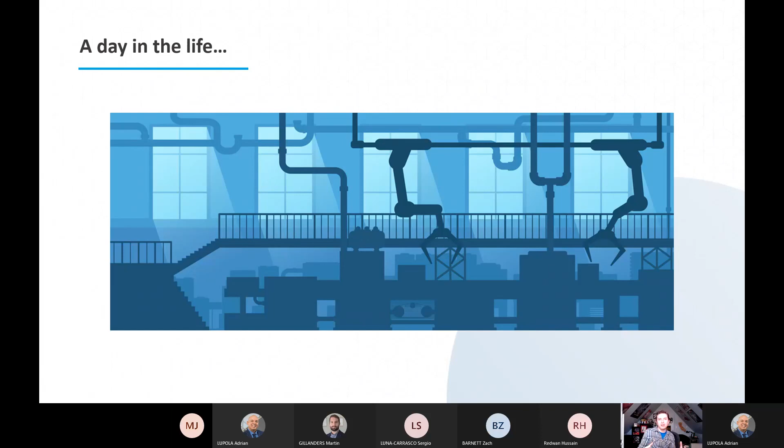It doesn't seem that bad, but do I really know how often that machine has gone down? What am I doing to track that machine performance in terms of what's the uptime? What's the output of that machine? If you're using a system like spreadsheets or pen and paper to manage your maintenance, you don't always know what that information is.

Inefficient maintenance practices is another area we come across, right? In that particular example, I walk out to the plant floor and I've never worked on that machine before. So it takes me a little while to figure out what the issue is and diagnose what's going on. And to further that scenario, parts and supplies management. That's another area where I mentioned in that scenario, hey, the belt happened to be in that storeroom at that time, but what if the right part's not there? How are you tracking your inventory?

If you're doing things manually, you don't always have that visibility, and sometimes those downtime situations can end up getting a lot worse. Not only that, but hey, I went in the storeroom, and what if the storeroom person isn't there for me to check out that part, right? Sometimes you end up using inventory and not logging what you're doing.

So then finally, it's lack of visibility to data, right? We're out there, we troubleshoot the machine, we get it up and running again. But at the end of the day, if we're using something like a spreadsheet, we don't have any information that says, hey, this machine's broken down 3 times this year, 2 times this quarter, whatever it is, right? There's some guesswork that's going on. And we're talking about a group of techs, a group of maintenance folks. How do you account for when these people leave, right? You start losing some of that tribal knowledge. So hopefully that scenario illustrated what these situations look like.

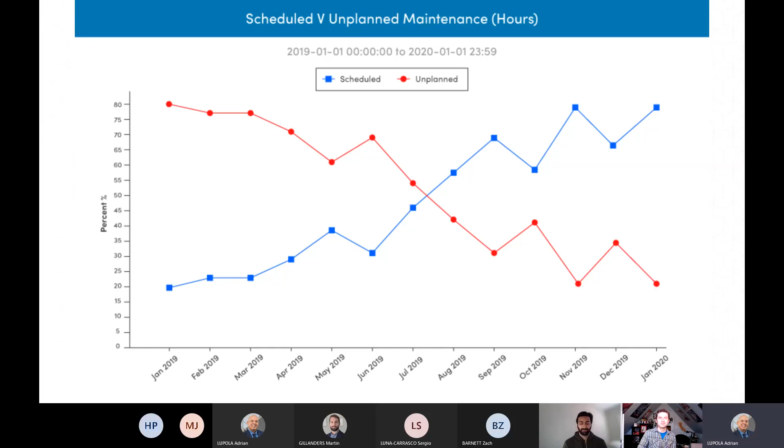So I'm just going to pivot over to a couple other tools that work very well with Fiix for more of an enhanced experience. And before I talk about OEE, Chris was mentioning how there could be visual aid that supplements the new technician's experience of working through different work procedures.

Now imagine the new tech comes across a job that they haven't come across before, or a scenario that's a little out of the norm. And the subject matter expert isn't available because you're either working on something else, or the subject matter expert is located elsewhere and you just can't get to the new tech. What do you do? You can use extended reality to communicate with team members remotely.

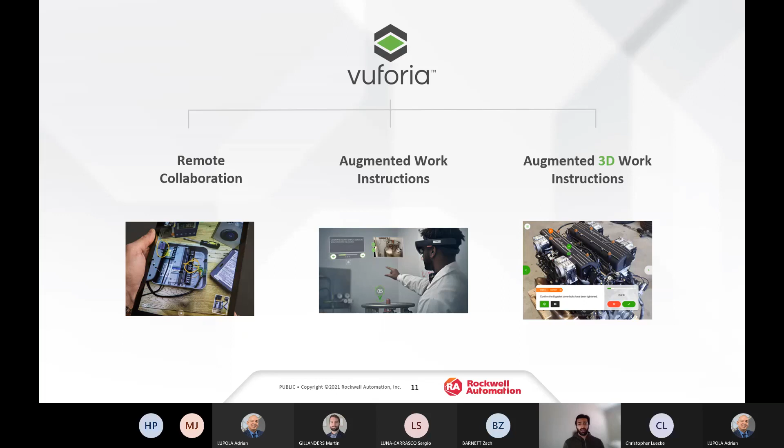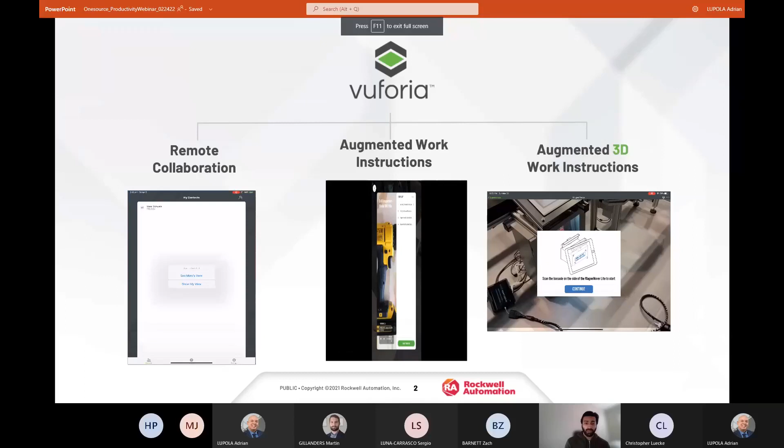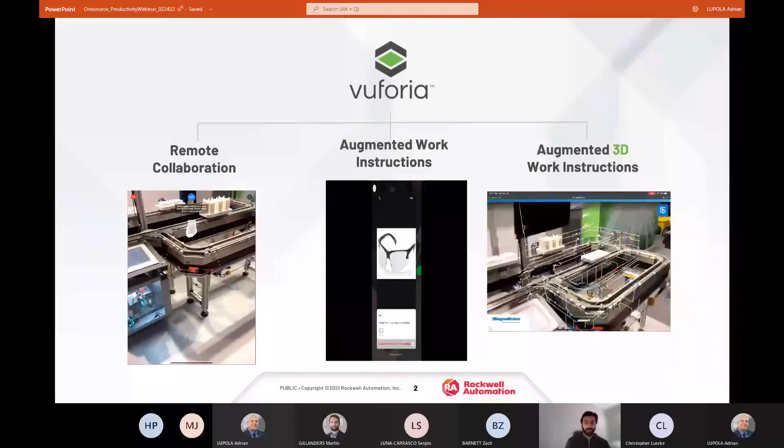So if you go to the next slide, you could imagine having a video calling capability so that you can show exactly what's going on, what the real-time conditions are. And the SME would be able to make annotations on your screen and show you here, maybe hit this button or open this cabinet and check this out. And this will give you the opportunity to not only fix things in real life, but also be able to export all of the annotations that were made during the phone call, and save them for future.

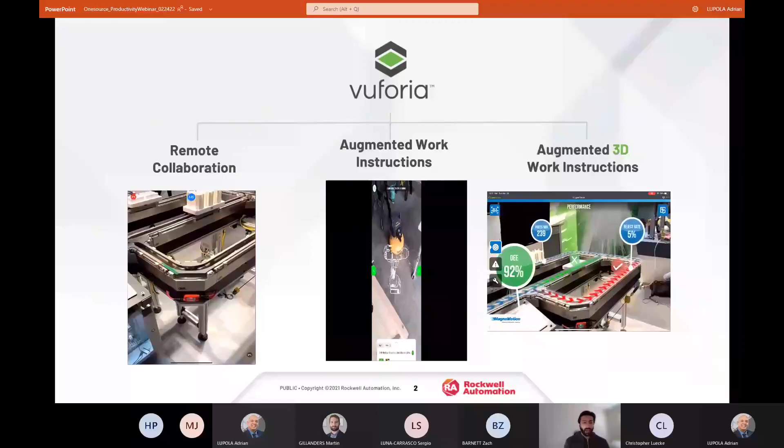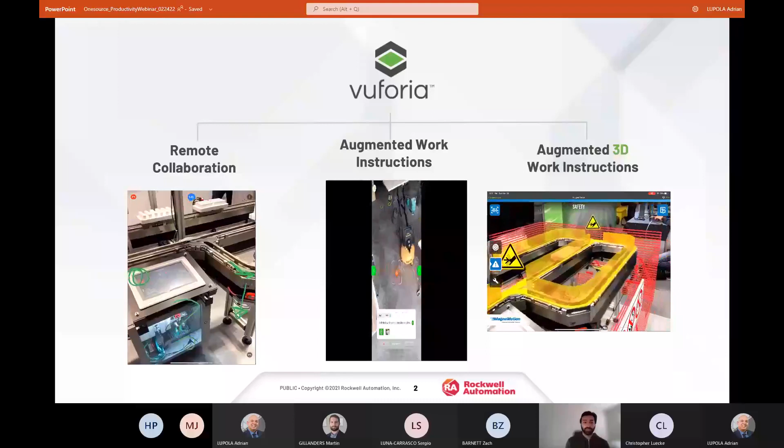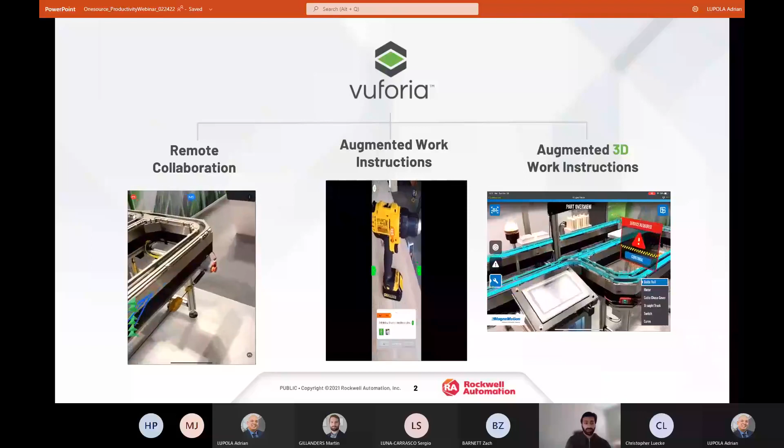In addition to having remote collaboration, you can also augment work instructions. What I mean by that is having images and visuals be superimposed on top of what you're already looking at. So Chris had showed you a mobile view of Fiix. You could use that same device and use the camera on that device to look over your workspace and see arrows and all sorts of helpful instructions pop up. So here, go to this area and open this, or hit this e-stop.

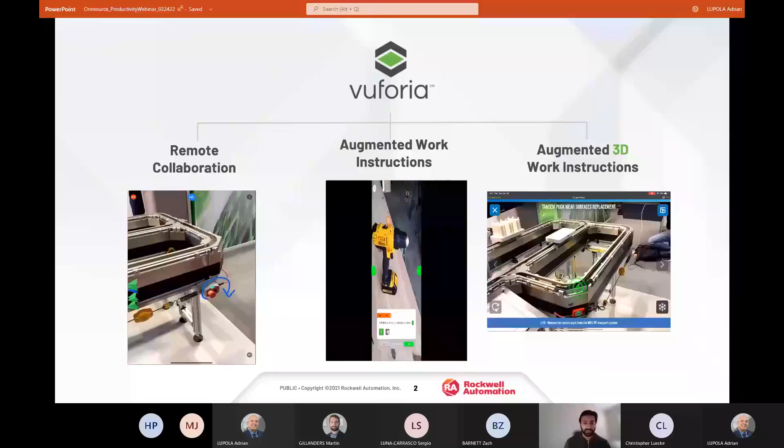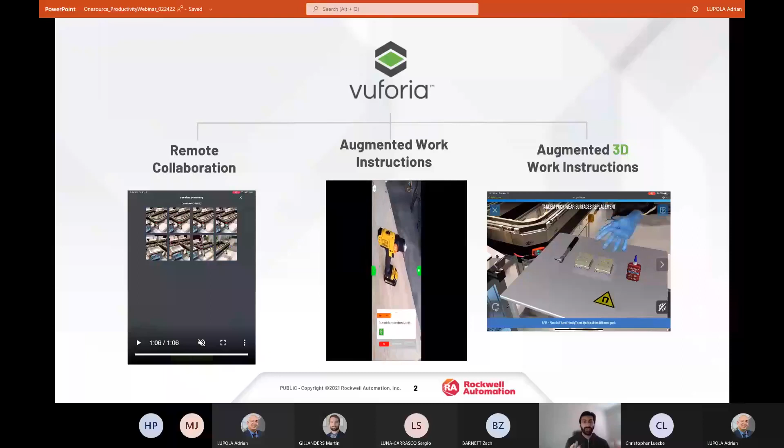There's also an electronic checklist that's embedded into this experience. So you can make sure that the technician is working as safely as possible and also in compliance with any kind of regulatory procedures that they need to be aware of. You can take this experience one step up and add three-dimensional objects. So if you're not sure if a machine is safe to operate, you can actually have physical or virtual images that can pop up on the screen to show you if something is safe to access.

And so this is all part of the Vuforia package, and we can speak to you about this if you have any questions about it. So now moving on to the next slide.

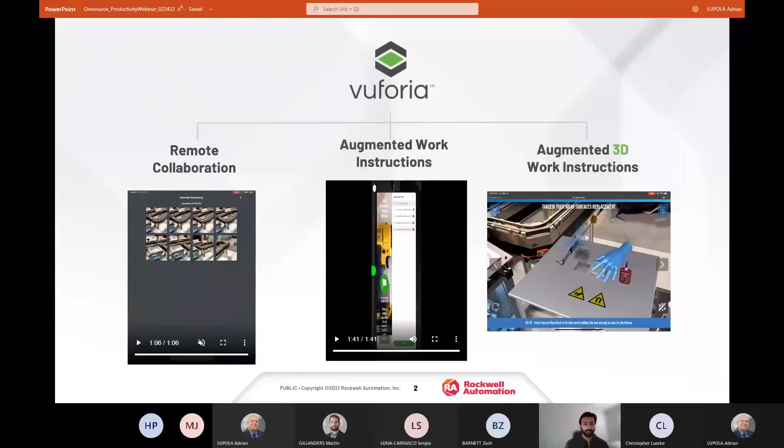So I just want to pivot over to OEE, overall equipment effectiveness. And so simply put, OEE is a measure of how available your machine is with respect to its performance and the quality of the goods that it's producing. So you can think of it as a rating that lets you know, am I optimizing my profit for the amount of time that this machine is running? So the higher your OEE count, the lower your costs are, and the more efficient you are being with it.

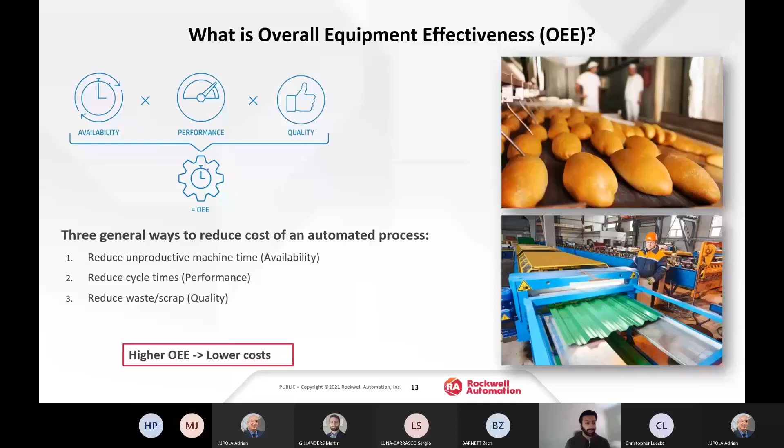And so there are chances that many of you are already doing OEE calculations by hand or in a spreadsheet. You just might call it something very different. And so if you move on to the next slide, it might look something like this. You're trying to calculate all of the metrics that are related to your KPIs. You might be getting data from your machines or from your controllers, and it's a very tedious process. It's something that you need to continuously update, just so you can figure out what the lost capacity is.

So if you look at the red bar that's on the bottom, you want to shrink that red bar as much as possible. Now, what if I told you that there's a software that can automate this feature for you so that you just focus on doing your job and making sure that the machines are being maintained throughout the day.

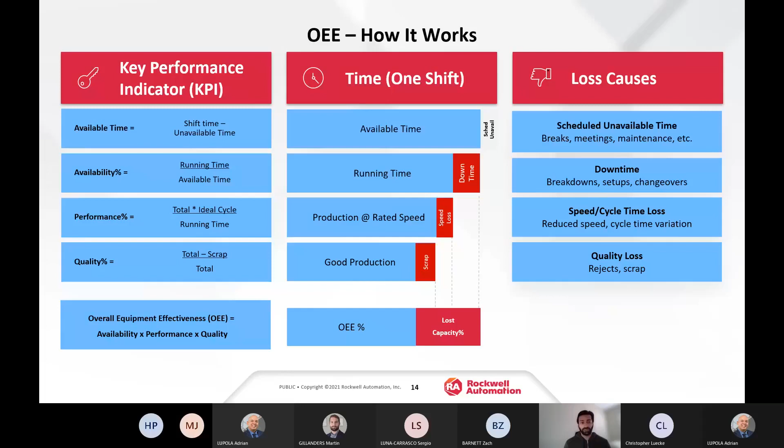So what a software-based OEE looks like, if you go to the next slide, it's a series of dashboards that'll communicate directly from your controller and get real-time data to help you understand what your events are, what your faults are, and how your machines are performing, and it provides this data to you with context. So, during which shift is my OEE being affected the most? Which lines or which machines are misoperating more frequently than others?

And when I say event, you can self-define what an event looks like for you. So an event could be scheduled maintenance. Maybe your OEE is being affected because there's scheduled downtime, or maybe it's being affected because certain machines have a common failure mode. And so an OEE dashboard like this can also help you perform root cause analysis by pinpointing exactly where you need to make changes to your automation system.

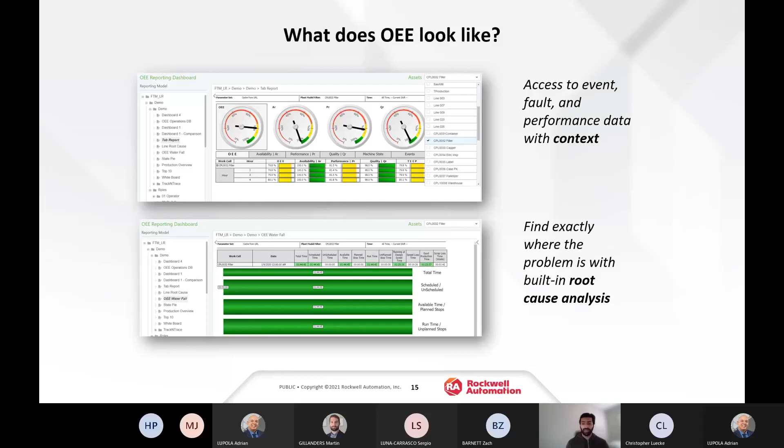And after standardizing your practices, you can start realizing any cost savings and look for an uptick in your OEE rating. And once you do that, you pretty much have a continuous improvement cycle where you constantly look for new areas of improvement until you've exceeded your goals and you create new ones.

And Chris, I'll just kick it back to you for any final words.

Yeah, I just wanted to add one thing, right? To really bring this all together, we talked really about scheduling maintenance and being proactive from manually scheduling what time things should take place, every certain number of cycle counts, every quarter, every month. The real power of this comes from being able to tie in data from the controller that looks at vibration monitoring, sensors, speeds, feeds, temperatures, etc.